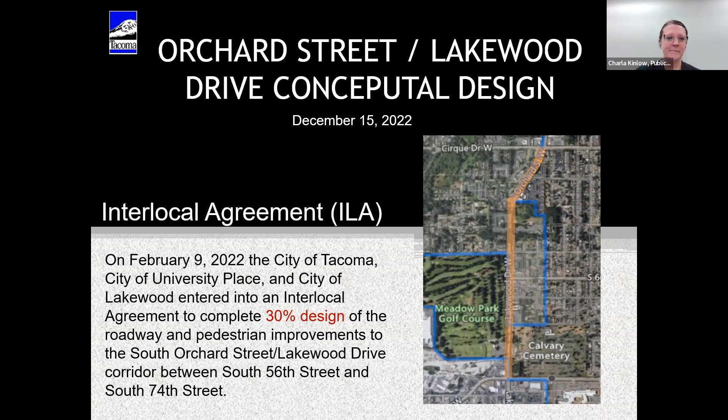So the agreement is for 30% design, and this talks a little bit about what 30% design means. Once we have a 30% design, we'll have plans that show the right-of-way lines and right-of-way needs for the project, the number of vehicular travel lanes, any bike lanes, bike facilities that we're planning on incorporating, and their associated widths.

We'll look at transit access needs, retaining wall needs, intersection needs, and that includes ADA crossings and signal improvements, information on existing utilities and utility adjustment needs. We'll look at street trees, try to retain trees where we can, maybe add some where we can. And then the plans will also show jurisdictional lines.

And then as part of the scope, we'll also do a cost estimate to help us with phasing and grant applications in the future.

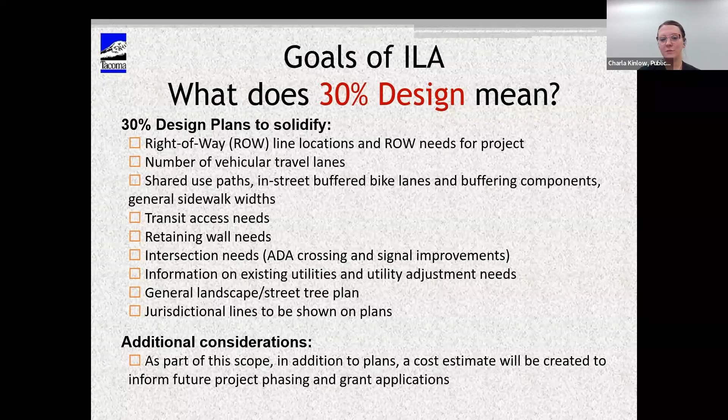So the budget for this conceptual or 30% design is just a little over 80,000, and it's spread between the 3 jurisdictions. City of Tacoma has the biggest portion since most of the right-of-way is within the City of Tacoma.

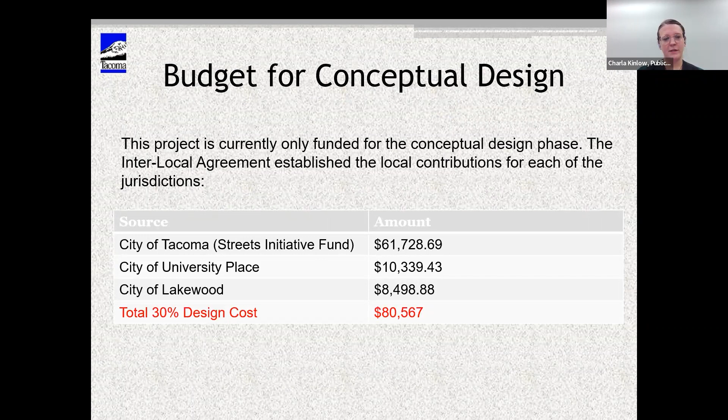At this point, I'll hand it over to Liz to discuss some of the City of Tacoma's policy support to help inform what the design will look like. Council Member Walker is also here to talk a little bit more about how we got to where we are with making this project happen.

Thanks, Charla. So Tacoma has a number of key policies that guide how we plan, design, and build our transportation system. So we wanted to briefly highlight a few of those today.

So the City of Tacoma has set a Vision Zero goal to eliminate crashes that cause serious injuries and deaths by the year 2035. This plan also has a strong focus on addressing the racial disparities we see in our transportation system. The plan includes in-depth crash analysis, which found that 75% of Tacoma's highest risk roads are in areas that have low or very low access to opportunity, according to our city's equity index.

The city's Complete Streets policy calls on us to use every transportation project as an opportunity to improve safety and accessibility. We're also guided by the policies in the city's Transportation Master Plan. These direct us to prioritize pedestrians, people walking and rolling, riding bikes, and public transit riders. We know that when we make our streets safer for people to walk and roll, we make them safer for everyone.

These transportation policies also align closely with Tacoma's recently adopted 2030 Climate Action Plan. Transportation is Tacoma's leading source of greenhouse gas emissions, and the plan includes the goal to complete our active transportation network by 2050. At our current rate, it'll take us over 119 years to reach that goal. So we know we need to pick up the pace, and projects like this one are a key opportunity to help us create a safe, equitable, and connected network that's accessible for all.

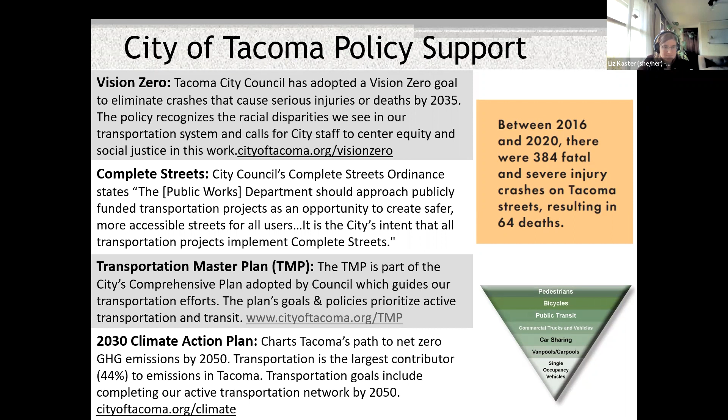Thank you, Liz. And I will just reiterate how important this project and all multimodal projects are to this council, as you can see with the number of policies we've put in place. And we're really excited to see this collaborative project happen. I know it's more challenging when you have more jurisdictions, but it really excited to see this moving forward.

We spent some time out there checking out the intersection, we did a little press conference out there. This was part of the Week Without Driving. But what we saw really firsthand there is the safety and accessibility concerns along the corridor.

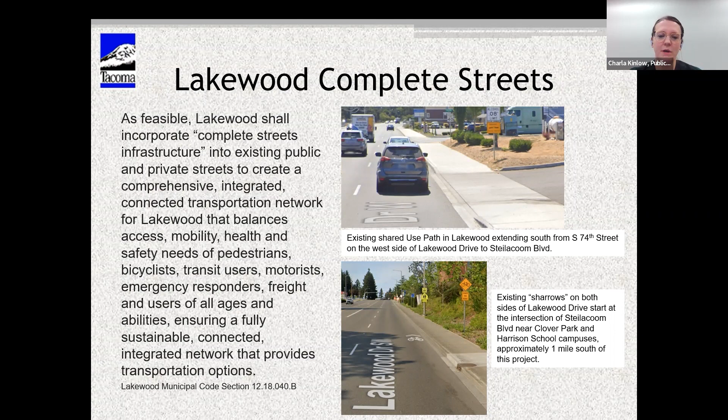Lakewood has been integrating some aspects of that into their projects already. Just south of this corridor, from 74th down to Steilacoom Boulevard, there's a shared use path along the west side. Once you get south of that, Lakewood has incorporated sharrows, so bike lanes in the road, that go about a mile south of this project.

University Place's comprehensive plan has multiple policies supporting and encouraging the establishment of complete streets, ADA improvements, speed limits that improve safety, bicycle and pedestrian improvements, sidewalks on substantially redeveloped streets, a system of bicycle routes, pathway and trail connections, and expanding opportunities for walking and biking.

This image on the slide was taken out of University Place's comprehensive plan, which shows this area as part of the proposed bicycle route system.

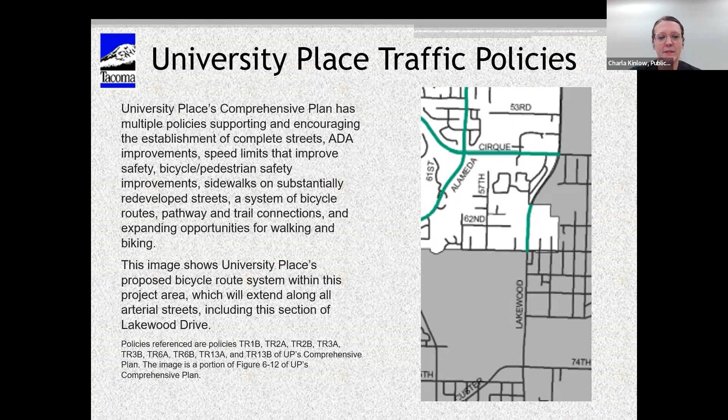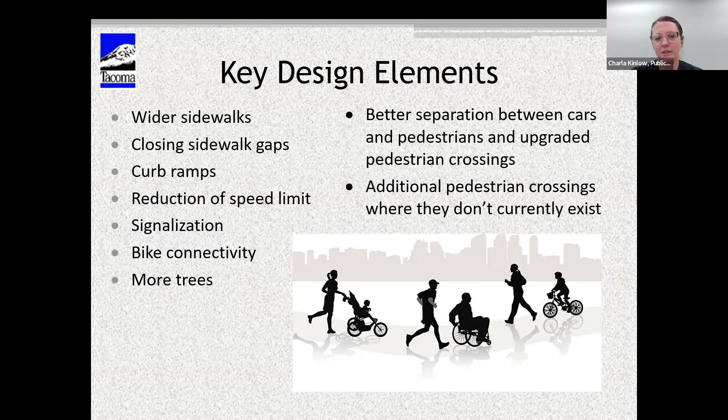When you put all those policies and goals together, it puts us on the path of wanting to incorporate these key design elements: wider sidewalks, closing sidewalk gaps, curb ramps, a reduction of the speed limit, signalization, bike connectivity, more trees where possible or retaining trees where possible, better separation between cars and pedestrians, upgraded pedestrian crossings, and additional pedestrian crossings where they don't currently exist.

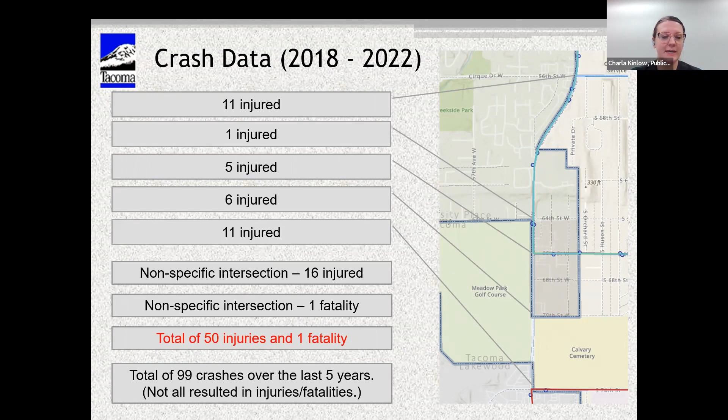Here's the current Pierce Transit stops in the area. We've got Route 53 in blue and Route 202 in red.

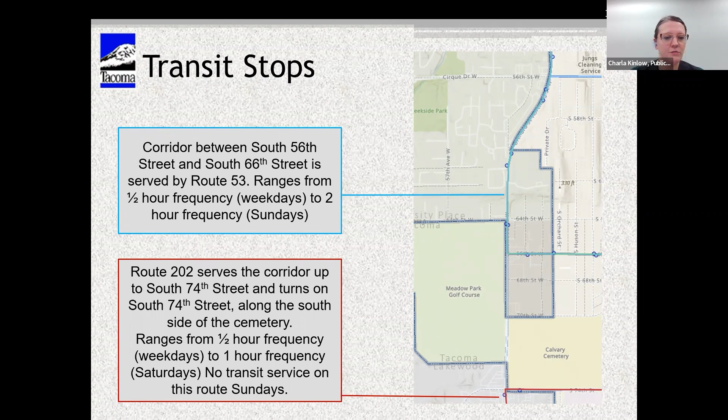Now we have a few slides showing some of the existing conditions. There's actually multiple transit stops in the area that aren't accessible to all users. This is just one example—you can see the lack of sidewalks and lack of access.

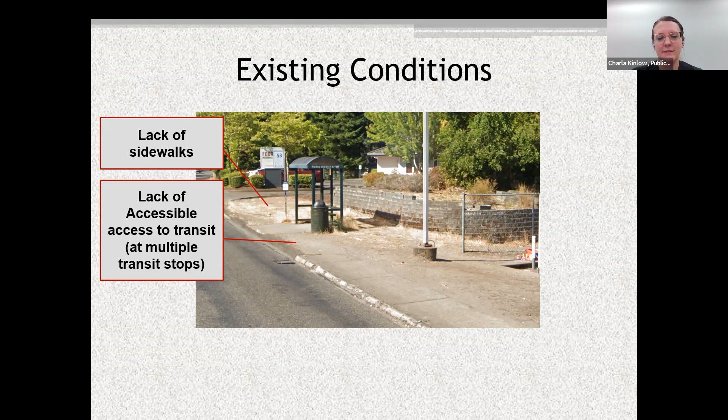This is another situation that can be dangerous for users of the corridor. We call this area along here goat paths or cow paths—demand lines is another term for it. People taking non-official walking routes because there really is no other option, putting themselves at risk. People with disabilities that affect mobility don't even have that as an option.

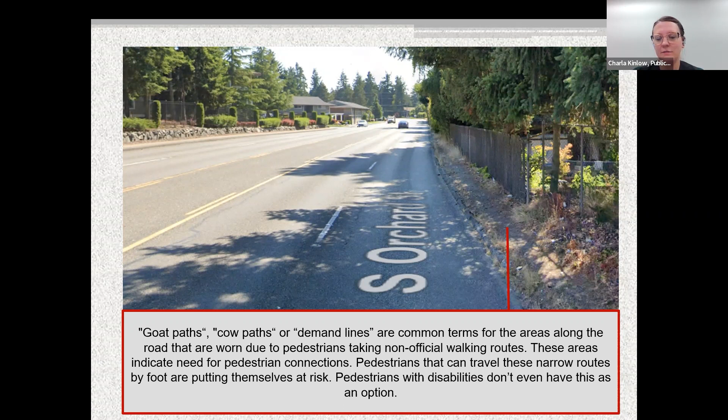This is the intersection of 66th Street West. Again, you can see the lack of curb ramps, lack of sidewalks, just a general lack of bicycle and pedestrian infrastructure.

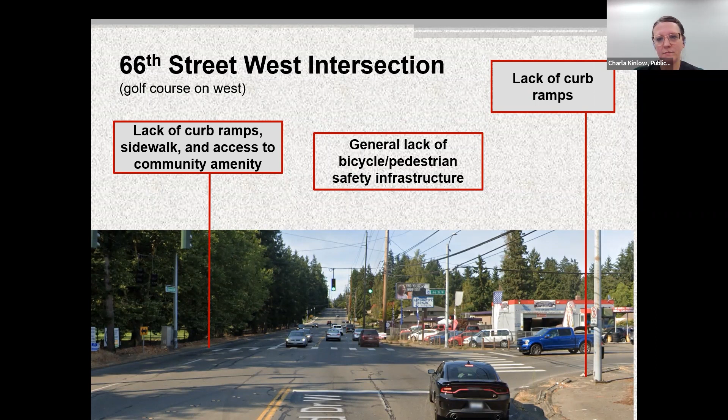Here's a cross section of the typical existing conditions—actually kind of the best case scenario. As we've pointed out and shown in the pictures, there are a lot of areas where there is no existing connected sidewalk on both sides. But in some areas we do have 5-foot sidewalks on each side currently, along with 11-foot drive lanes and a center turn lane.

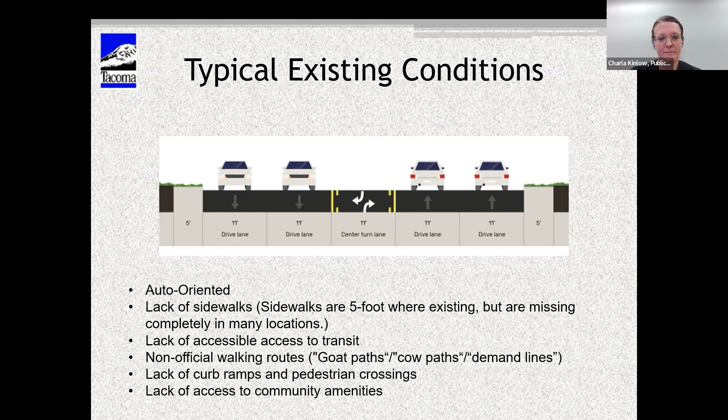At this point, I'm going to turn it over to Jacob to discuss a couple of concepts that have been designed for current consideration, along with some photos showing examples of what a shared use path or protected bike lanes might look like. Thank you, Charla.

As Charla mentioned, we are in the conceptual portion of the design. We're really looking at what the options are, what best fits with the area and with the goals of the project, and what would best serve multimodal users—not just automobiles, but also bikes and pedestrians and those with limited mobility.

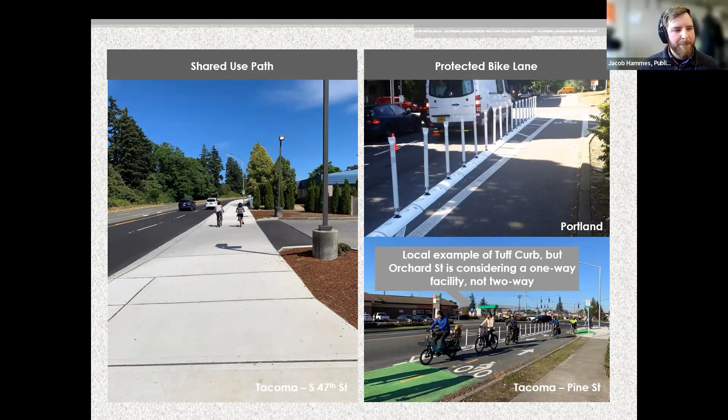Once we're done with the conceptual design, we'll use those preliminary designs and the information gathered to apply for different grants, either federal or state. There are a lot of different sources out there. Assuming we can get funding, we'll move forward with completing the design. Then there's a right-of-way phase, where if there are any jogs in the property lines that need to be adjusted, we'll do that. Then on to construction, assuming we can secure the funding.

The best way to keep up to date as the project moves forward is cityoftacoma.org/OrchardStreet. If you want to navigate to it from our general website, go to cityoftacoma.org, then there's a quick links box in the lower right-hand corner. Click on city construction projects, and you'll be able to see all of our projects and navigate to the Orchard Street Lakewood Drive link.

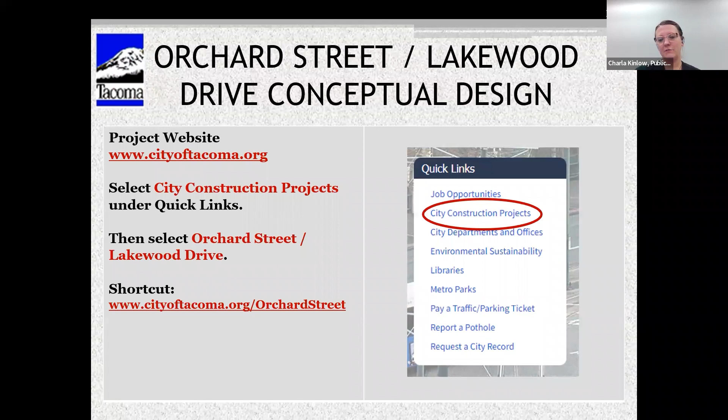I think we can move on to the Q&A portion of the meeting, and Tina is going to help me with that again. If you haven't put in any questions yet and you want to, the Q&A button is at the bottom of your screen. Tina, do we have any questions? As of right now, we don't.

We did get a couple of public comments before the meeting. I know sidewalks are definitely something people are looking for in the neighborhood, and transit access was another huge priority for the project. Someone mentioned there's a daycare along the corridor, and said they saw people with strollers try to go along some of those demand lines, goat path, cow path type areas, like I showed in a previous slide. So yes, as part of this project we will be working to address some of those concerns.

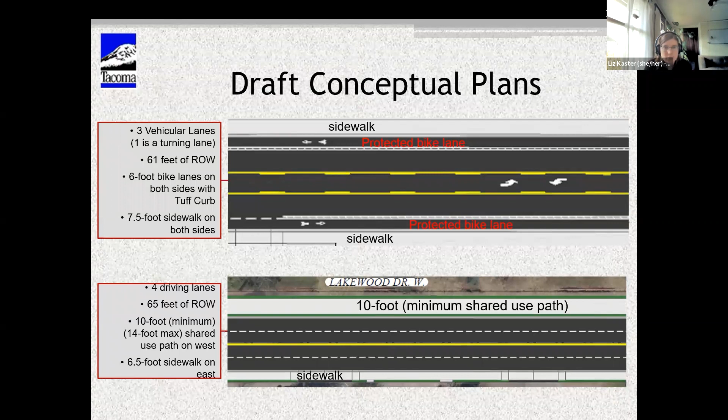Can you show the one that has waves? Thank you. Looking at something like Tuff Curb, similar to what just went in on Oak Street, where we've got the two-way protected bike lane. We're going to see how that holds up on that project. We've also got the Cedar Street protected bike lanes using a similar product. Our plan is to see how that works as we implement these protected bike lanes, and continue to evolve and follow the research and what materials are out there. But with that narrower buffer, that's definitely a consideration.

Thank you, Liz. Any chance of art or paint at curb ramps?

I can take that, okay. If you'd like. Or Jacob, did you want to? I mean, I can answer part of the art question.

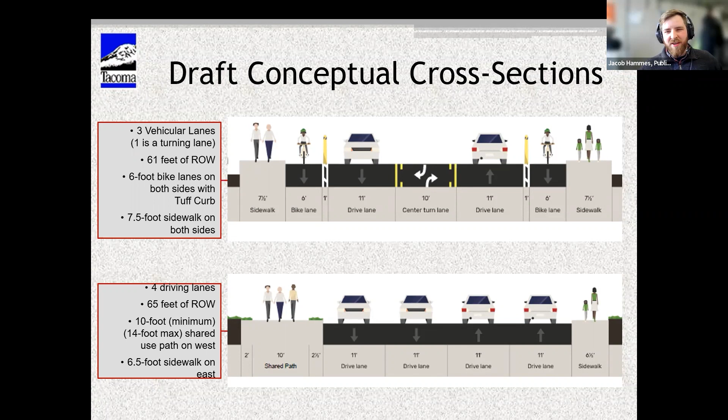One of the city's policies for capital improvement projects, which this would fall under, is to do 1% of the project budget for art. That's a 1% minimum, not a maximum amount. So that would certainly be included.

With the paint, we don't paint the actual ADA ramp—we need that visual consistency there. But on a couple of projects, we're looking at painted bulb-outs as a way to integrate art into projects. I don't know if that will be appropriate on this project or how the designs will actually play out, but we're excited to try that on a couple of upcoming projects, including the J Street Bike Boulevard.

All right, thank you, both of you.

So this one is more of a statement, a comment, not a question. Please increase the greening and urban forest in this part of the city. Currently, the canopy in that area is approximately 8%. The City Council of Tacoma is aiming for 30%. We are behind, and prioritizing greening will make our city more climate change resilient. Thank you.

Yes, thank you for that comment. That is something that is on our radar as well—looking at it, trying to retain trees, trying to plant more trees where we can to increase that urban canopy. There's a lot of things with the project to balance right now, so I'm not exactly sure what the final design will look like, but that is something we also want to prioritize and support, as our city policies call for it.